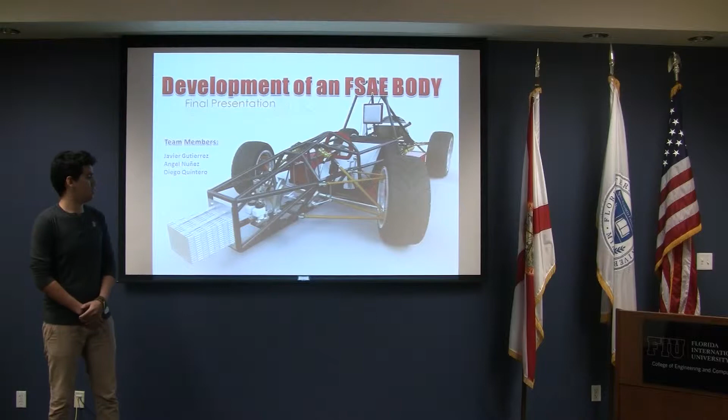Good morning. We are Team 2, and our senior project is the development of a Formula SAE body. The team members are Diego Quintero, myself, Javier Gutierrez, and Angel Nunez, who is not here today.

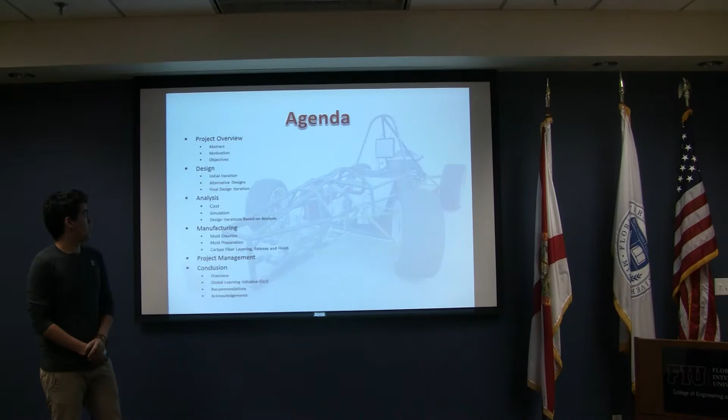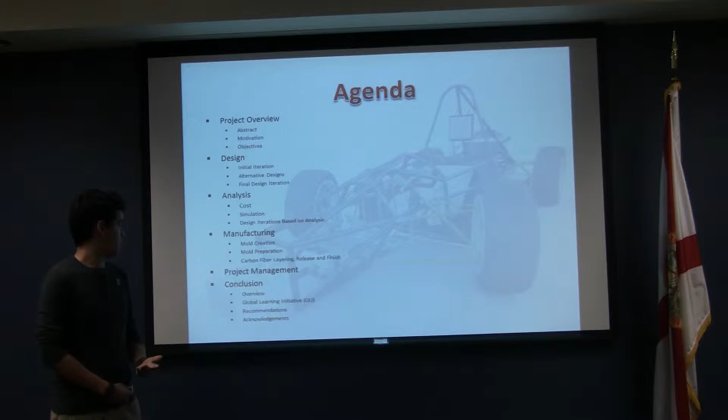Here's a brief agenda of what we're going to be covering today. We'll give you a brief overview of the project and how we split our entire senior project process into 3 different sections: design, analysis, and manufacturing. Then we'll cover our project management and the conclusion on what we learned, and final recommendations.

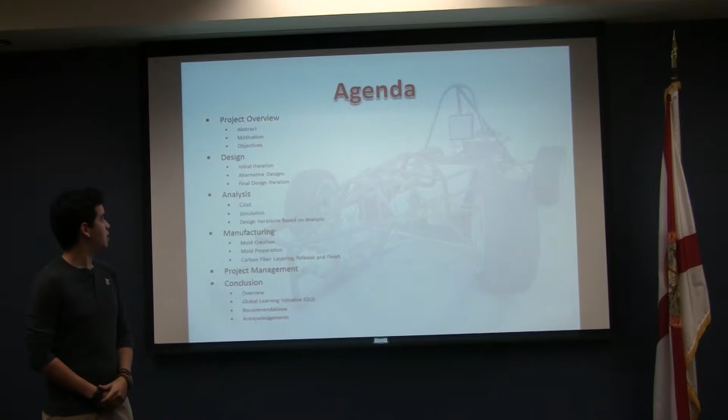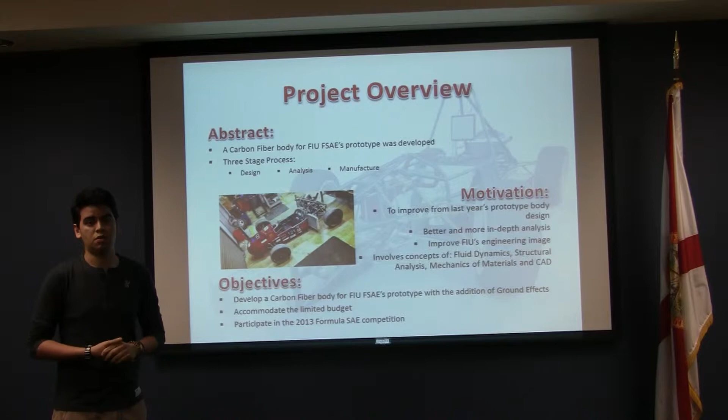Our senior project was to develop and manufacture a carbon fiber body for the Formula SAE race car. We decided to split the process into 3 different stages: design, analysis, and manufacturing. Our motivation for this project was based on the results from previous years. The SAE team started last year, and one of the areas that needed the most improvement was the body of the car and its aerodynamics package. We believe that by making it a senior project, we were able to have a more in-depth analysis and improve the overall design.

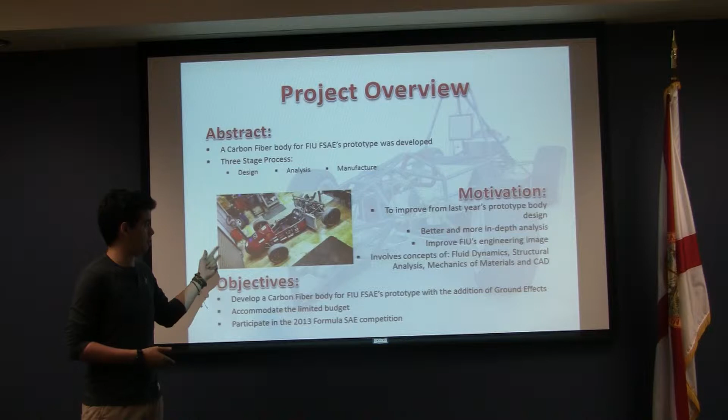This is a picture of the car from last year.

The first decision we had to make in the design process was the type of platform we were going to use for the body. There are 3 main categories: full monocoque bodies, a hybrid monocoque, and a space frame half body. The full monocoque is made fully out of composite materials with no tubular frame, and it holds all the suspension components and engine parts. The hybrid is half tubular frame, half monocoque, and the space frame is a tubular space frame with a body around it. Based on the SAE team's decision, they chose a space frame due to the manufacturing process and difficulty of the entire project, so we were going to do a tubular space frame.

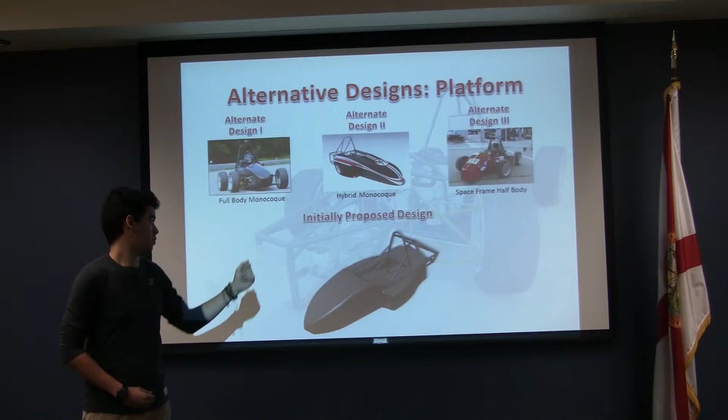This right here is the initial design that we created in Senior 1.

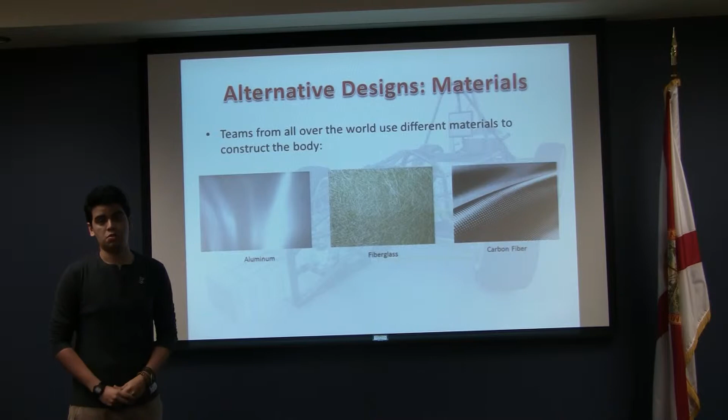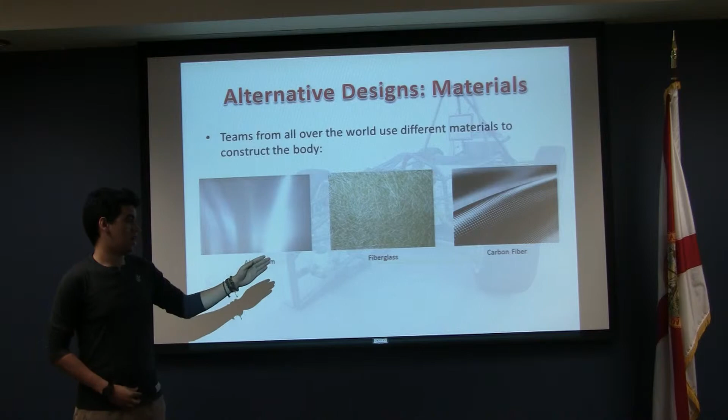Another design decision we had to make was what material to use for the body. In this competition, the 3 main materials used are aluminum, fiberglass, and carbon fiber. Each of these materials has different advantages and disadvantages. We opted to go with carbon fiber, which is the lightest material and easier to manufacture compared to aluminum. The only disadvantage of carbon fiber is that it's a bit harder to manufacture and more expensive compared to fiberglass.

Now Diego's going to talk a little bit about the costs related to the project.

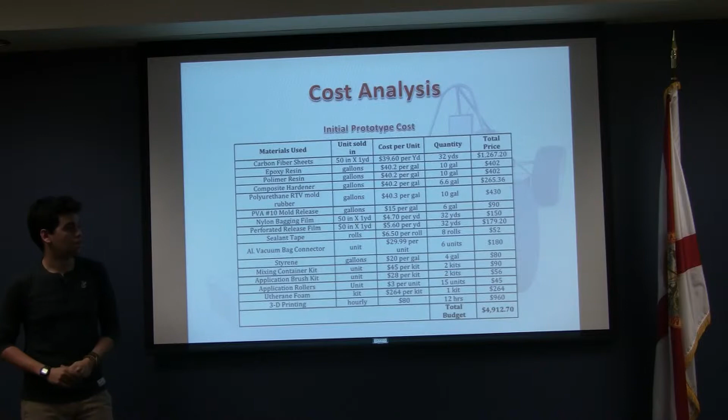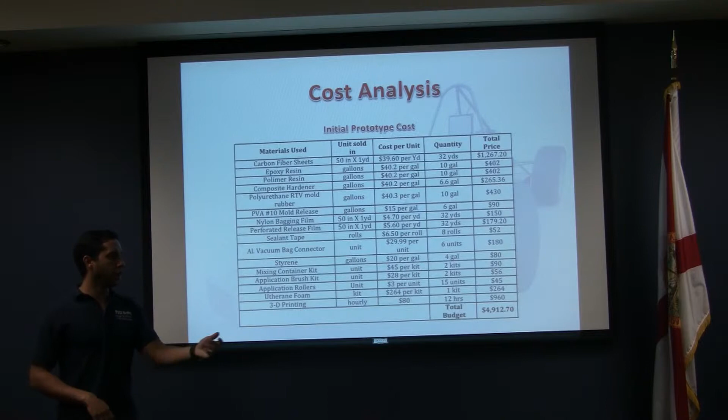This is the initial prototype cost, what we thought it would cost last semester, and as you can see here, our total was almost $5,000. After doing plenty of research and approaching companies and consulting professionals in the field, we were able to accommodate our budget to this: our total now was roughly $1,200. That's a reduction of almost 70% of the initial cost.

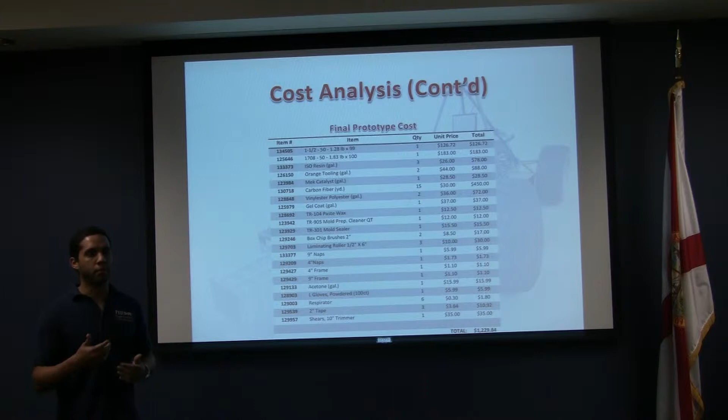What we did is, like I said, we presented a sponsorship proposal to companies, so we were able to get a lot of materials for free as donations for the team. We're treating the whole project as if we were a company. We had to do a sponsorship proposal, go to companies, talk to them, let them know about our product and what we wanted to do, and figure out a way to be on good terms with them. So we were able to reduce our costs by about 70%.

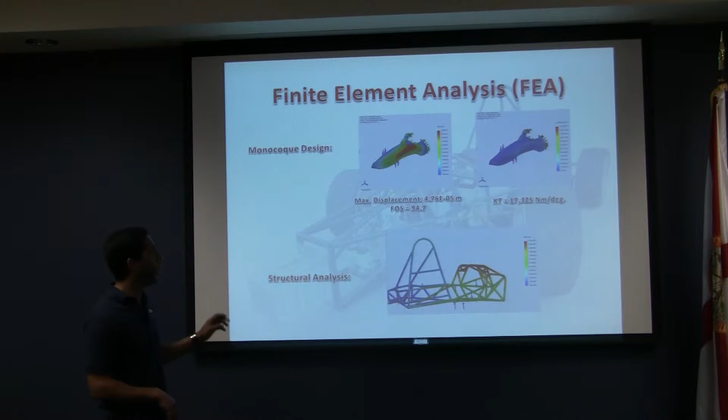So the first stage of our analysis project was to do some FEA analysis. Even though we're only doing the body of the car, not the space frame, we want to leave this project as a handbook for next year's SAE members. So the first analysis was to treat our design as if it were a monocoque. That way, if next year they'd like to do a monocoque, they know how to go about it. We mentioned the benefits and cons in our project.

With that, we found a maximum displacement of 4.76 times 10 to the power of -5 meters, and a factor of safety of 94.7%.

The reason we got that factor of safety is because we're talking about carbon fiber here. It's not like you can go into SolidWorks and just put carbon fiber, because it depends on how many layers you use, how much resin, what type of resin, what type of carbon fiber. So what we did is research carbon fiber composites that other teams had tested, and we got material information from that and analyzed it. But for next year, our recommendation is to actually manufacture a test sample, test that, and get your material properties from that part.

Also, we found a torsional rigidity of 17,325 newton meters per degree. We had a goal of about 12,000, and that's what we researched, because again, we're not reinventing the wheel, we're just trying to improve on previous year's analysis.

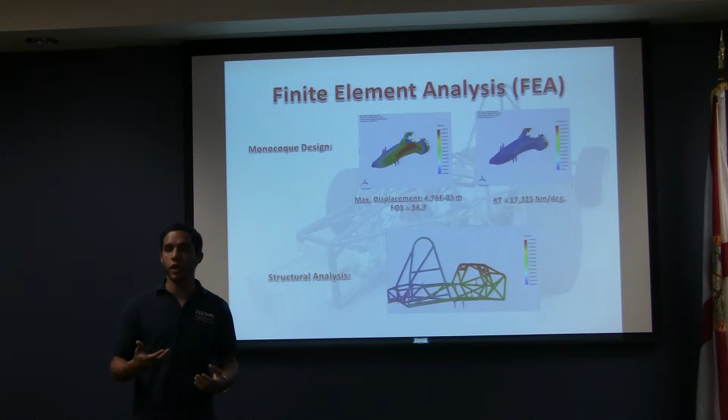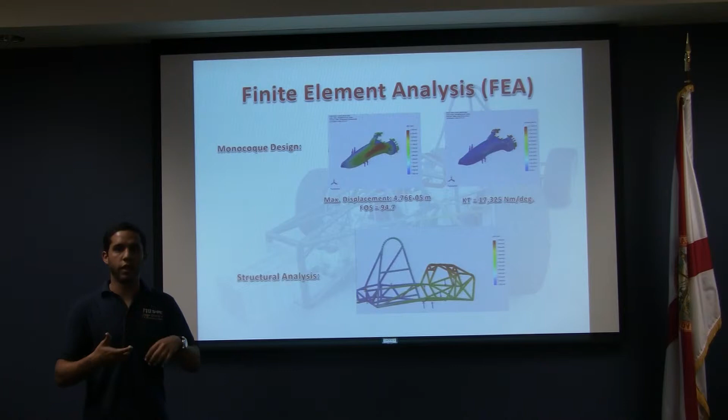For our design itself, we took the FEA analysis the team did on the frame and figured out key points where we could mount our body to the car, since we wanted to mount it to points where we saw the least deflections. We picked about 15 mounting points on the car so the body would not be affected as much by the torsional rigidity the chassis feels with suspension travel.

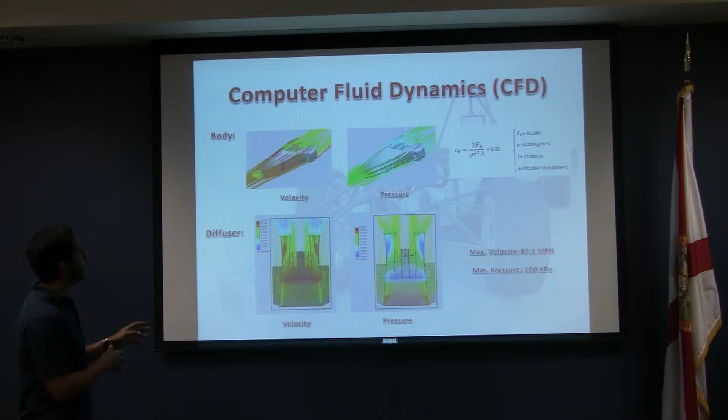The most important part of our design was to do CFD analysis. We took our time to do it on the body itself. We did velocity and pressure analysis on both designs. On the body, we focused more on velocity since we wanted to get a drag coefficient from it. So what we did, you'll see later, was several iterations of the body, and we wanted to find the body with the least amount of drag.

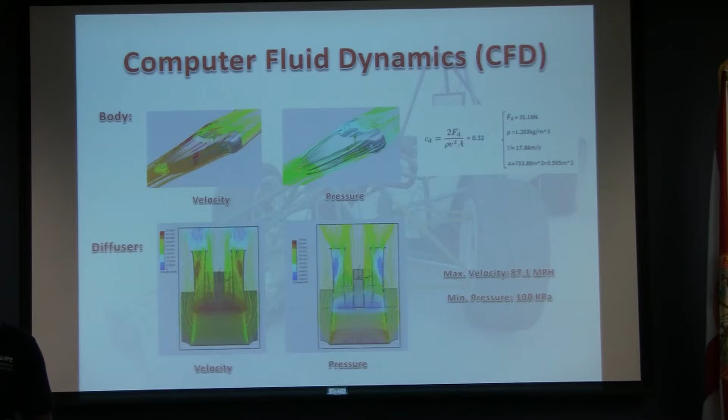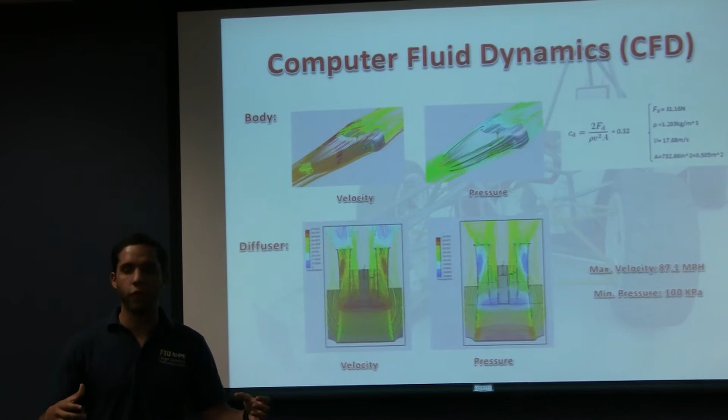One of the things about the body is that we were limited to the frame they had on the car. We didn't want to make too big of a body, because then we wouldn't be as performance oriented as we wanted. We wanted to keep it light and small, so we wanted to wrap it all around the frame of the car. We were kind of limited on that, we didn't have too much give.

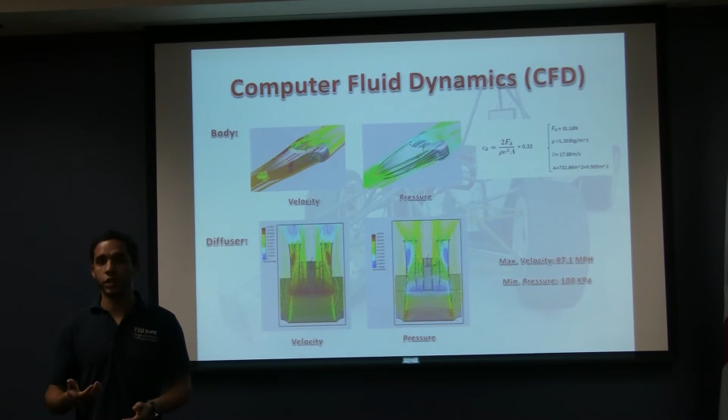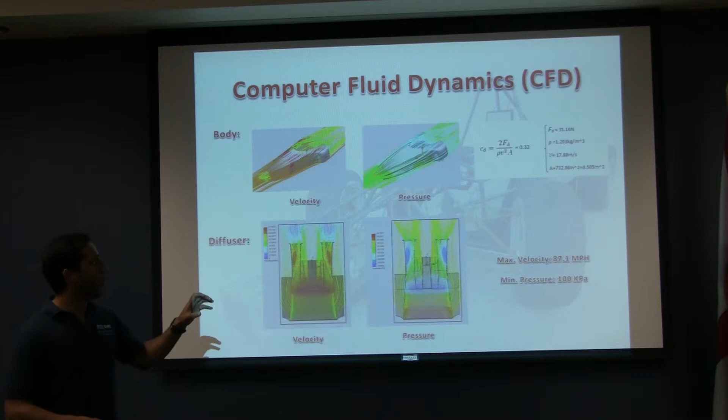Drag coefficient is not the only, or the key, factor in this design. What we wanted to do is generate downforce so the car sticks to the ground and performs faster and better. So we wanted to add a diffuser to the car to increase downforce. With that, we found a maximum velocity generated by the diffuser underneath the car of 87.1 miles per hour, and a minimum pressure of 100 kilopascal. Why minimum pressure? Because per our research, we wanted to get as low a pressure as possible underneath the car, especially underneath the wheels, so the car will stick to the ground.

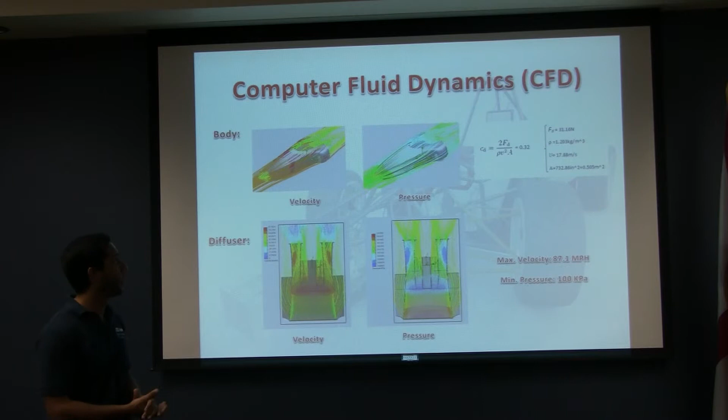Next slide, please. So again, these are some of our iterations based on CFD analysis, and the body itself was based on the frame that the team did.

On the diffuser, we saw how performing the CFD analysis, we were able to get a really good approach of what we wanted with the fifth and final iteration.

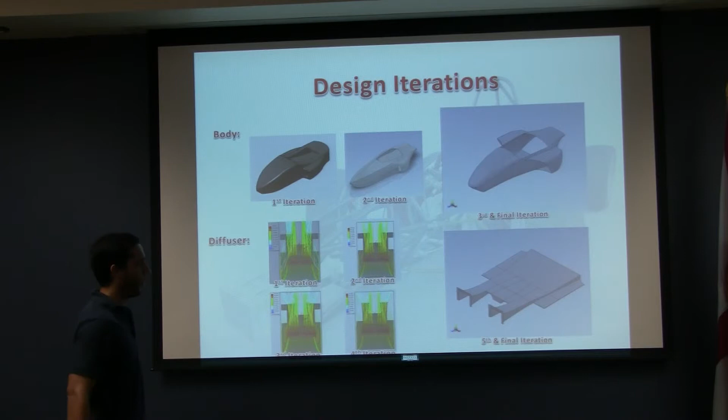Now Javi will talk a little bit more about manufacturing.

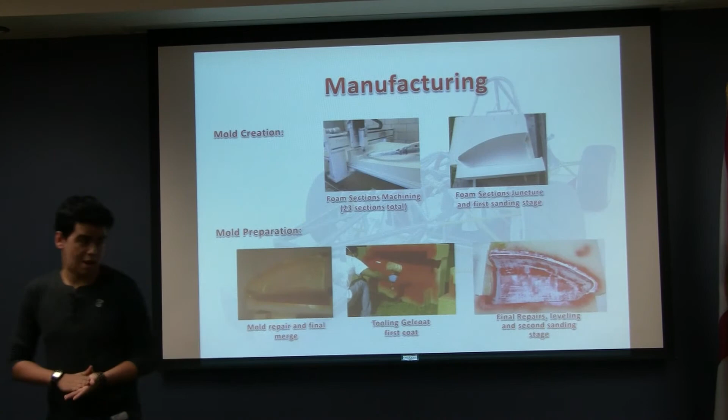The manufacturing of composites is a very tedious process. It takes a large number of steps, and since most of the work is manual, the way we did our specific project, we first started with two-pound foam, and we were able to CNC it with the help of the architecture department.

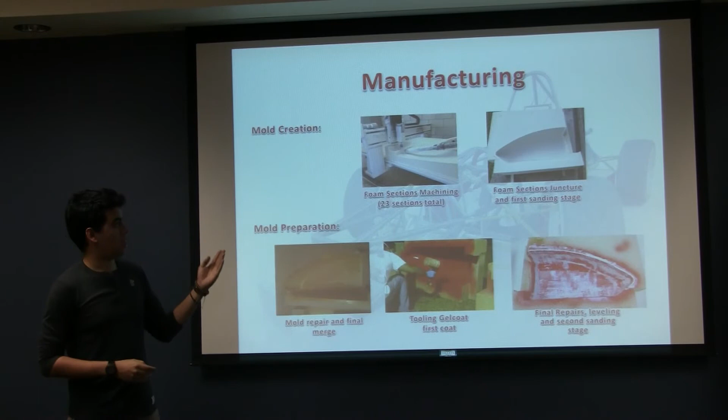After that, we were able to get the different molds and put them together. And when we put them together, we would always get gaps and small areas that we had to repair. So we first had to sand the mold, and then we used wood glue to cover the pores from the foam and fix all the small gaps and repairs that we needed.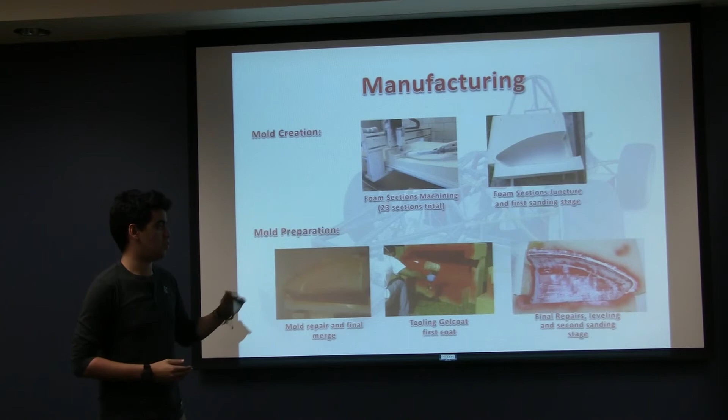After that, we used polyester gel coat, which with a hardener would later on become solid for us to be able to lay the carbon fiber on. But before that, the main priority is to keep this surface as smooth as possible. So we used Bondo putty to further fix the surfaces and smooth out every surface and curvature in the mold.

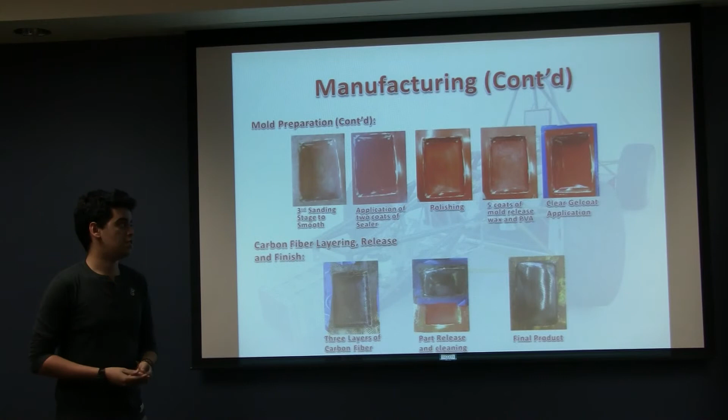Since it was the first time making composites, we conducted various samples before going big scale with our project. As you can see here, these are some of the steps that we had to take before laying the carbon fiber.

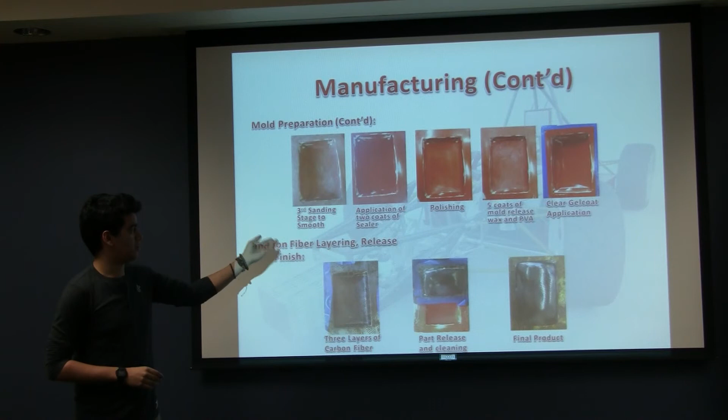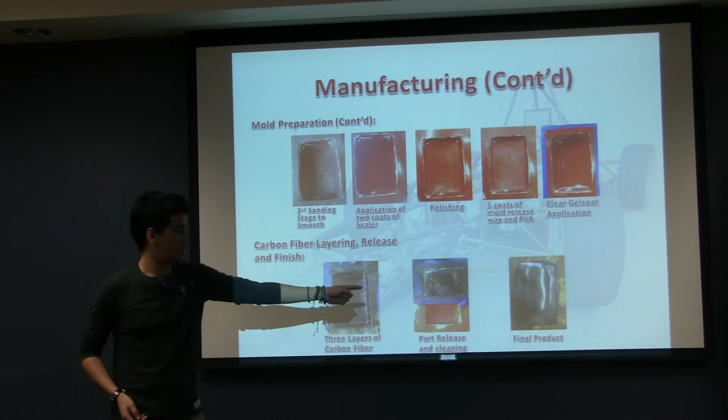We had to add layers of sealer to cover even more pores, polish it, do about 5 layers of wax, and finally we were able to lay carbon fiber with resin. Here's a final product of the sample that we conducted.

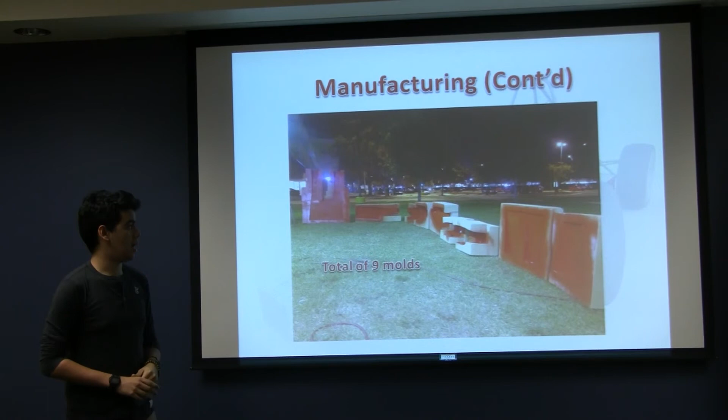Here is a picture of the 9 molds that we had to do the same type of process with.

Now Diego's going to talk a bit about the project management. So this is a timeline that we set last semester, and as you can see, we're pretty much on schedule.

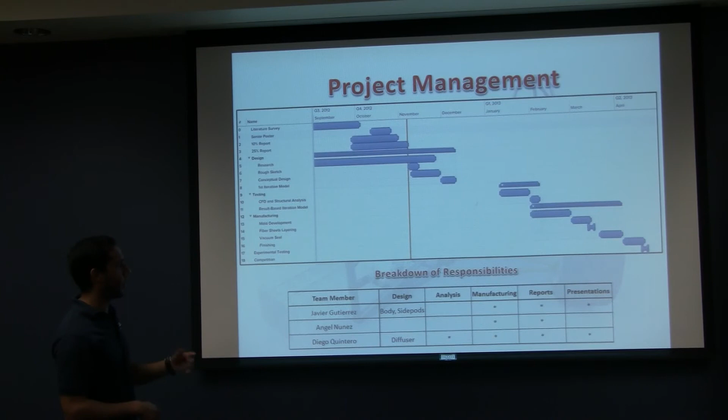We had roughly about a week or so of delay, and it was because we were dealing with a team and they had some problems with design. Also, on this table, you can see the breakdown of responsibilities as we approached this project.

Next slide, please. So for the conclusions, like I said, we learned a lot from this, since we hadn't done any composites work before.

Mostly, our recommendations are on the manufacturing stage, since you have to do a lot of research, you have to consult with a lot of professionals in the field, because you're dealing with chemicals, and the types of materials are really specific and have to have the specific quantities when you're mixing them together.

Some part of our global learning was that we had to use American units because our manufacturing of the foam, the machine was set in inches, so we had to do everything in inches. Also, since we're dealing with an international competition, we had to abide by the design and manufacturing rules, because we have to pass technical inspection in order to be able to race.

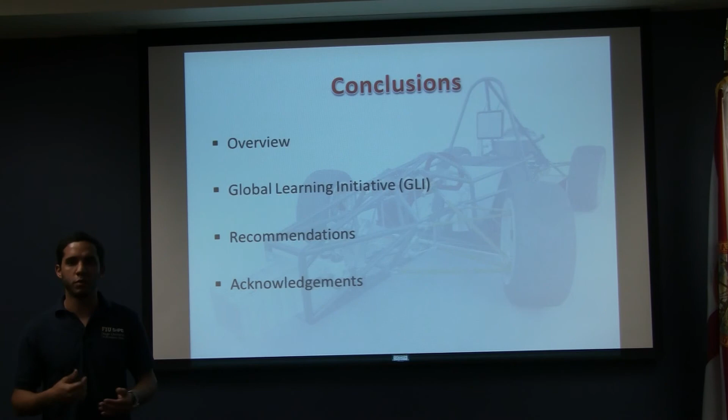Some of the acknowledgements we want to make: thank our sponsors for everything, for donating materials. Some students here collaborated a lot with us, our faculty advisor, and some other professors. Again, thanks to the entire SAE team.

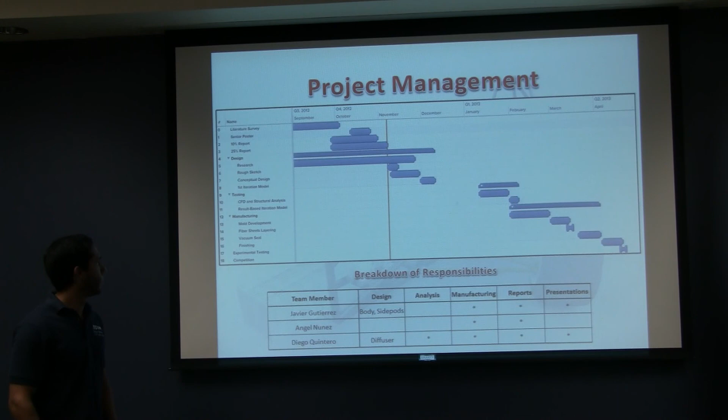All right, give them a nice round of applause. Here's a test sample over there.